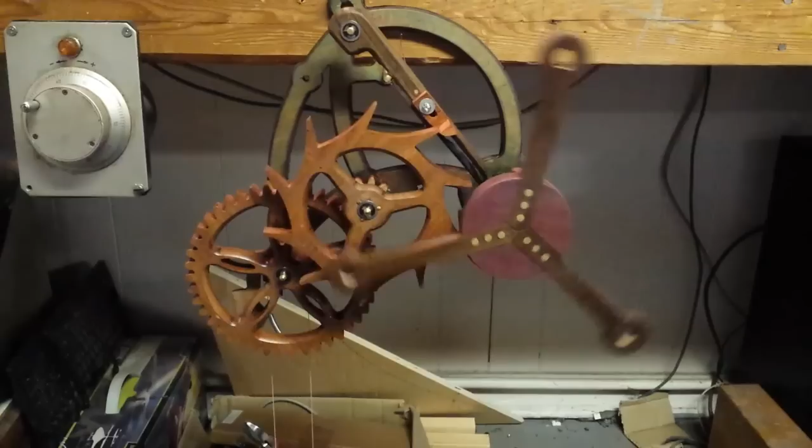Hello everyone and welcome to the video on escapements for Gearotic Thoughts.

This new escapements module has changed some from the escapements of Gearotic Motion. This one is a bit more exact and it's written to a higher specification. Calculations for both the recoil and the Graham are taken from the British Horological Institute calculation test sheets. So the mathematics involved are very accurate to those specifications.

The drawings of the pallets are somewhat stylized from acceptable versions. I did not aim for a crown and anchor, for example, on the recoil, but there's specific reasons why I've gone this route, and we'll talk about those in the future. 4 types of recoils are being offered. Grasshoppers are not yet in the mix.

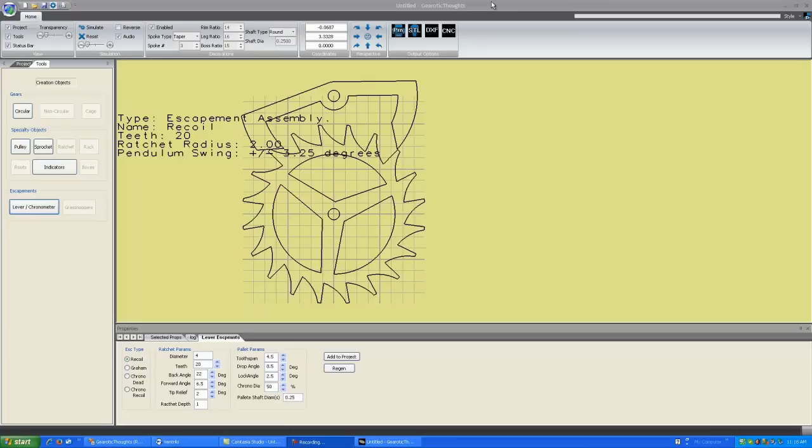They will be added at a future time, but grasshoppers are complex enough I'd like them to have their own module so that we can play a bit of games with giving you some more power with them and add those to gravity escapements. We'll give you more escapements in Gearotic Thoughts than you ever had in Gearotic Motion, as there seems to be a great deal of interest in it. So let's look at the 4 that we have offered.

You can see the one running on the screen now is called a recoil escapement. It is the easiest escapement to build. These 4 escapements are listed in order of complexity to build, and recoil would be firmly in the beginner camp. Anybody can build a recoil escapement. If you have a pair of scissors, you could cut this from cardboard and it would run well. They are notoriously stable. They are not, however, the most accurate timekeepers.

The reason for this is if you look at this ratchet, the center device here is really called a ratchet. And if you look what happens when a tooth comes down, you'll see the ratchet goes backwards for a moment. This is called a recoil. This recoil creates a situation where you lose accuracy in clocks. It's because when the pendulum goes to push the recoil backwards, the recoil is pushing against the backlash of all the gears before this one.

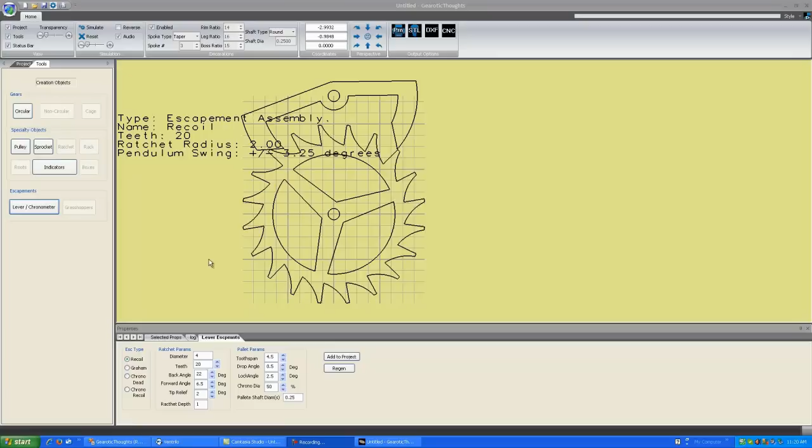And since backlash grows and accumulates over time in a clock or a timekeeping piece, it means that the accuracy of the pendulum degrades over time as well. It slowly begins to degrade, and every few months you have to retune a recoil clock for accuracy.

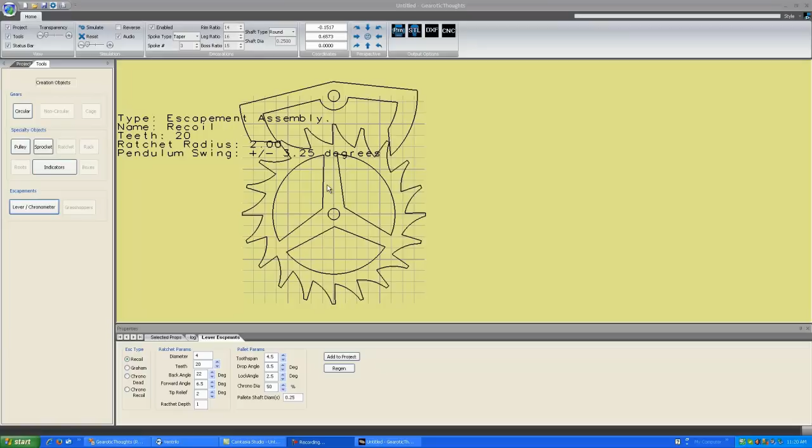Now, that having been said, many of the things you'll build with Gearotic Thoughts, including wooden clocks and so on, the point is not about their accuracy. There is no such thing as an accurate wooden clock. They all are bad at keeping time. They vary in how bad exactly, but they're all bad at keeping time.

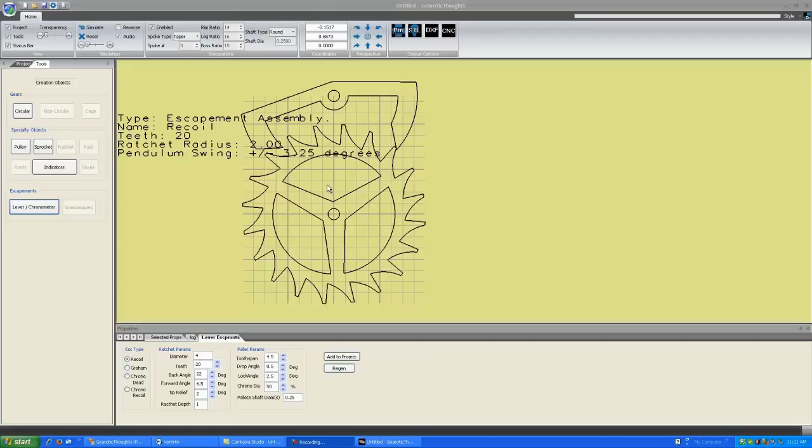But when you build a wooden clock, the point is not to tell time. Wooden clocks are a piece of craftsmanship. They're an art form, a kinetic art form. I'm starting to go the other route and building clocks that don't tell time. I call them tickers. You'll find many examples of them on the web, and I find them intricate works of art. And again, they don't tell time, so you wouldn't have to worry about inaccuracies in time.

However, take it from me, the people who build clocks will tell you that though these recoil clocks are easy to build, they are not the best timekeepers because of this recoil action pushing against backlash in gear trains.

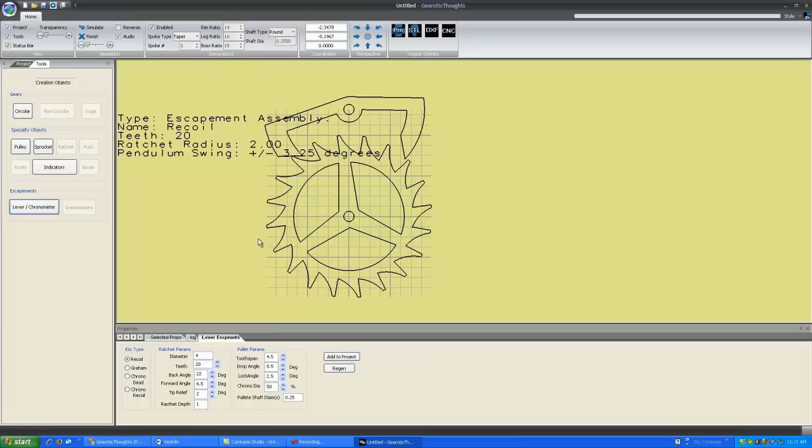Now, we have several selections on the screen. You'll see it's not tied to module anymore. People who are building clocks will generally build this escapement mechanism to a set diameter. They're not really worried about the module of teeth and so on. So Gearotic Thoughts has gone to a diameter system where you enter the diameter of the device that you wish to build. Here, for example, we have 4 inches and it's set to a 4-inch diameter.

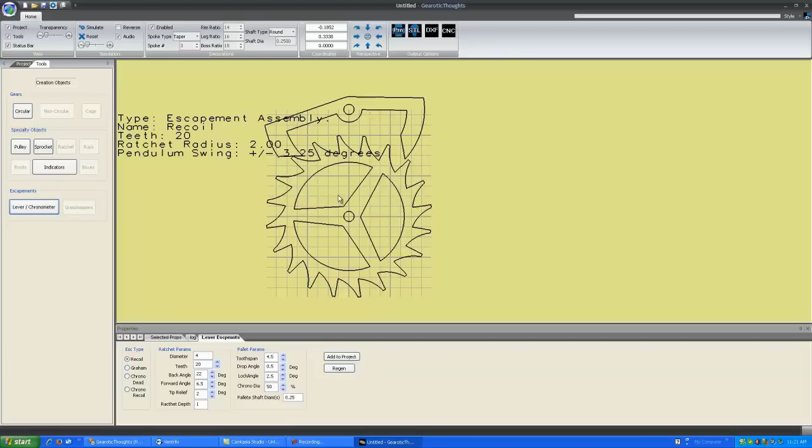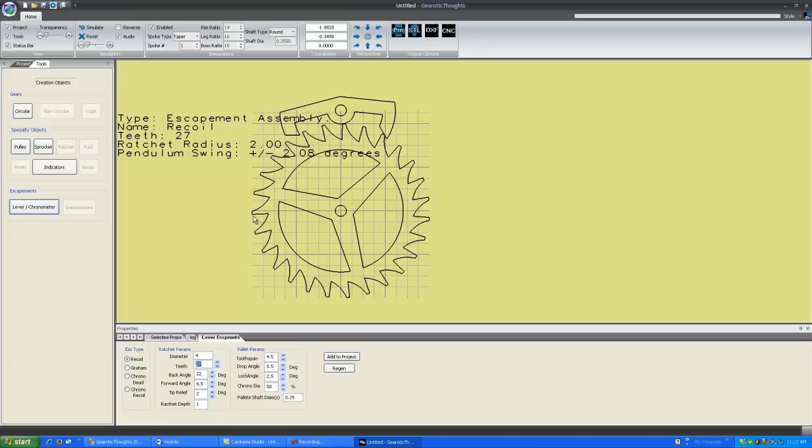Now, number of teeth on your ratchet, on this recoil ratchet, are set down here on the tooth box, and you'll notice as you change the number of teeth, the listing for pendulum swing changes. The amount a pendulum will swing on a recoil escapement is typically set by the mathematics. So we're simply telling you that you're going to get a plus or minus 2.08 degrees of swing when this pendulum has hit its equilibrium and is keeping time.

For the recoil escapement, you can ignore the next 2, back angle and forward angle. Those are used only in a Graham ratchet, but we'll talk about those in a moment. Let's take a look at this in close-up.

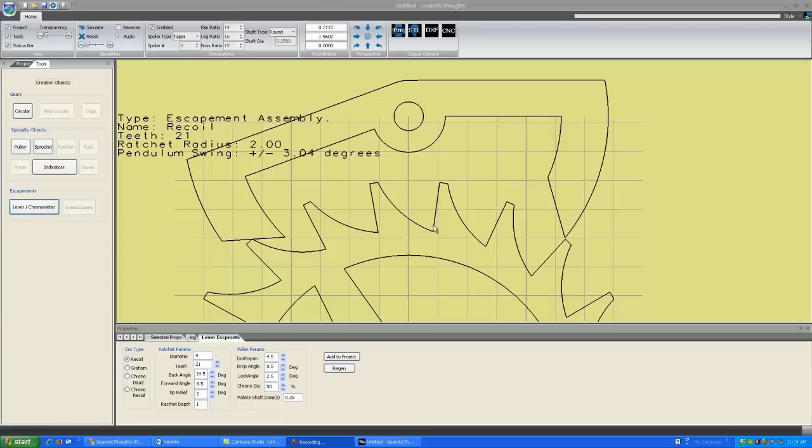The ratchets can be hard to build in 2.5D out of wood and other materials because too pointy of a tip will snap off easily. If you picture that this ratchet is made from one plank of wood, for example, and not plywood, the grain of the wood would always be running in one direction. If you get a tip of a tooth and it's on a grain which is running in the wrong direction, you're going to snap the tooth off, unless you've got a fairly good tip allowance to it.

So because of that, we have a tip relief where we can set the number of degrees of tip relief. And you can see as I change it, the size of the tooth of the pallets on the recoil pallet change. And this is because we have to worry about a thing called drop and lock in such escapements. So I'm going to turn the tip down to about 1.5 degrees, which is pretty typical when I'm cutting something out of wood.

So I guess what we should say is the more tip relief you have, the less power you're going to be transmitting to your pendulum, because as the tip gets larger and a higher degree, the pallet size has to get smaller to be able to fit in between the teeth. So obviously, the more room you have between teeth, the larger the pallet impulse face can be, and the more power you're going to transmit to a pendulum.

Again, if you're making a piece of kinetic art, this may not be too important. Your overriding concern will be to get a thick enough tooth to provide stability to whatever you're building. And the amount of power you're transferring will probably be a bit secondary to your consideration. If you're building a clock, however, you want as much energy transfer to the pendulum as you can get to maximize the length of time that your clock will run on a wind in the end. I can tell you 1.5 degrees is, again, pretty typical.

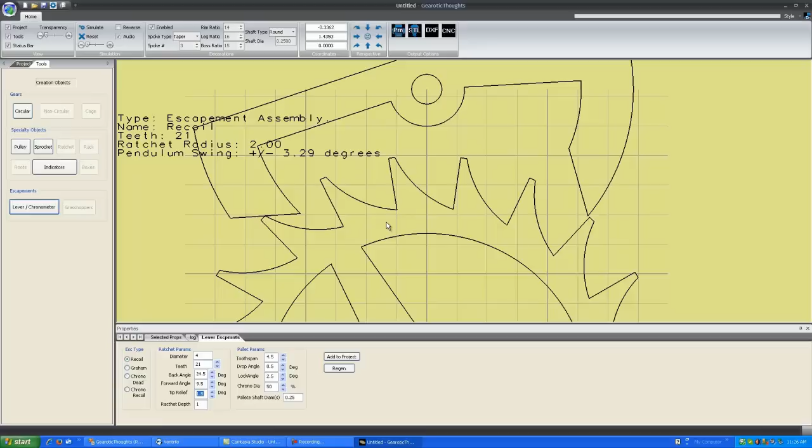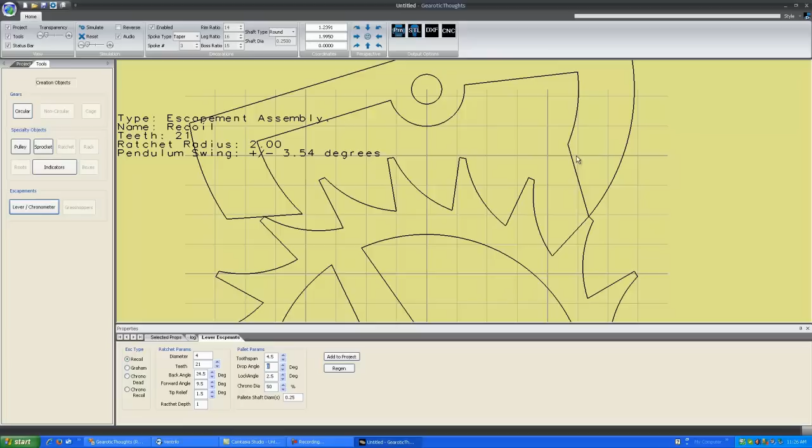So watch what happens as we simulate this. We have our 1.5 degree tip relief, so the lengths of our pallets are changed, but watch this tooth as it comes down, and we can see it just misses. If we change the drop angle to 0, you can see that the tooth here on the right is just touching the ratchet tooth, and this would not be very good. At some point, looseness and tolerances in these bearings and so on, the tooth is going to hit.

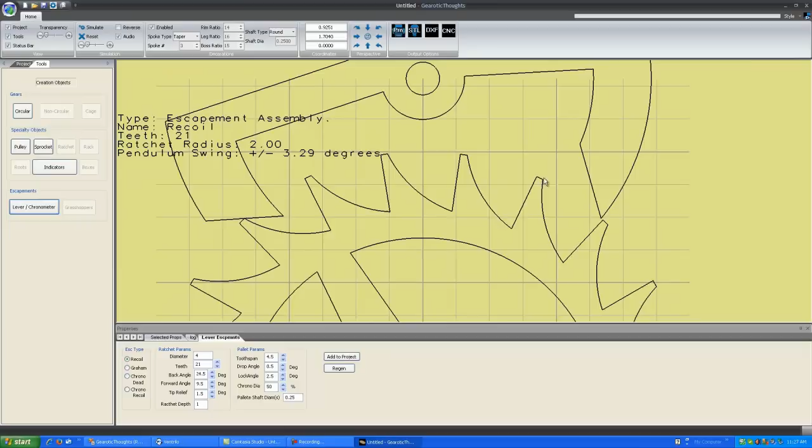So because of that, we'll add a little bit of drop in order to make sure that the tooth will miss, and I'm going to go with about 0.5 degree of drop, which is typical. Tip is actually included in drop. So we have 1.5 degrees of tip and then 0.5 degree of drop for a total of 2 degrees of drop. That's getting about the upper limits of what you would want for the sake of efficiency in transferring energy to your pendulum. But just make sure with your drop that you're missing this tooth as the recoil comes down.

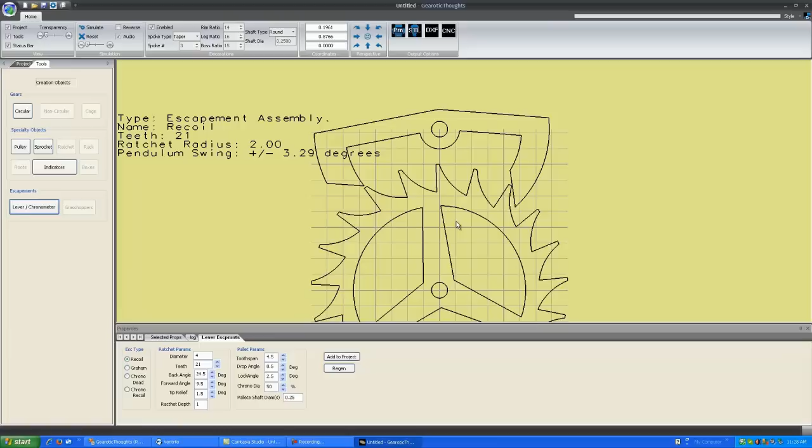We hit, it recoils, tooth slides off, and process repeats itself where we just missed the tooth. That's drop. So that's all we really need to worry about in terms of a recoil. We have a lock adjustment to worry about, and the number of teeth and the span that you wish to span. These are all decisions up to you based on aesthetics and however you want to time your device.

Typically, a recoil escapement has around 30 teeth and has a tooth span of about 7.5 teeth of a 30-tooth wheel. How you pick the number of teeth of this depends largely on the ratios you intend to use in your clock, and we'll leave that for a future video. But that's a recoil escapement in general.

You'll notice there are many other settings down here. They'll have no effect on a recoil. A recoil is so simple that all there is is teeth, tooth span, and lock. That's really all you need to worry about.

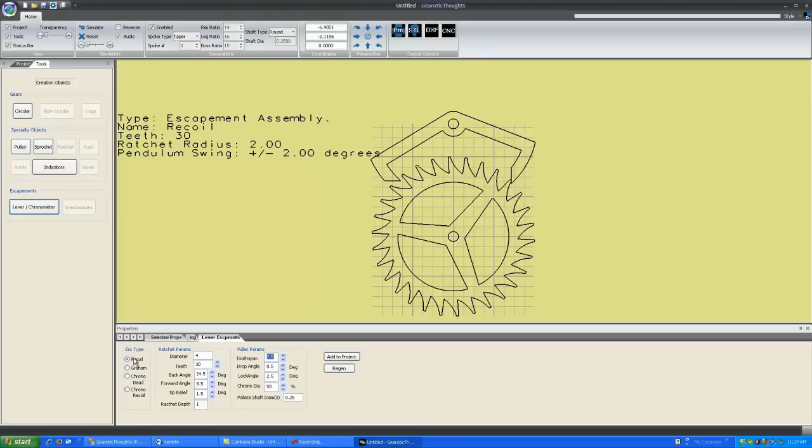So then it's off to the Graham escapement. The Graham escapement was a way of fixing the problems that a recoil escapement had in its losing accuracy because of the backlash of the train. You'll notice that the ratchet here does not move backwards. It moves only forwards. This is why it's called a deadbeat escapement.

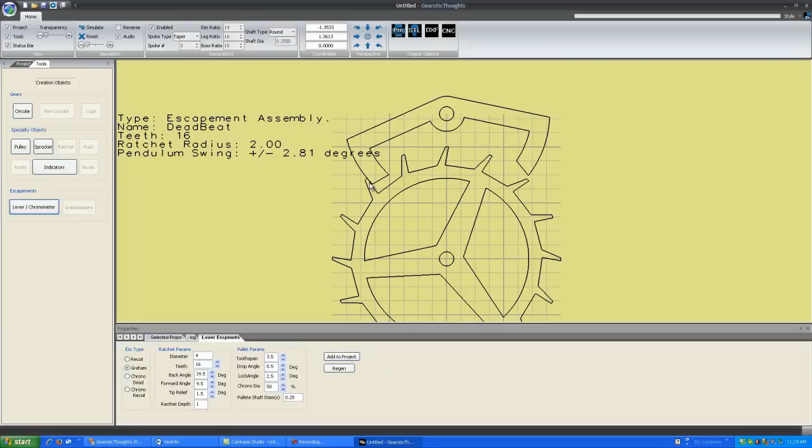It is dead when the clock beats. The ratchet wheel never goes backwards. But we have things to worry about because of it. The reason that we have a ratchet which doesn't go backwards is because of these rounded lock faces on the pallets. You'll notice that because they're rounded, the tooth comes up and hits, and it's at a tangent relationship. It never has to go backwards as this moves back and forth.

Let us take a look at one tooth and see what we have to adjust here. You'll notice as this tooth comes down, it hits this face, and there's a large portion where it sits still before pushing on the pallet. This wants to be minimized, but you do need some, and this is called the lock adjustment. The amount of lock you have is basically how many degrees of the lock face of this pallet which you are striking on when the tooth comes in.

And down here on lock angle, you'll find I'm set at 2.5 degrees, which is quite a large portion on here, and that would be unusually large. If I cut it down to 0 degrees, you can see that what happens is when the other side releases its tooth, this tooth will come up and hit the pallet exactly at this corner. This is a situation you wish to avoid, because again, if there's any inaccuracies, remember that at this moment in time, this pallet is swinging downwards, and you don't want to crush this tooth if the tooth just happens to get underneath it. This is why we add lock.

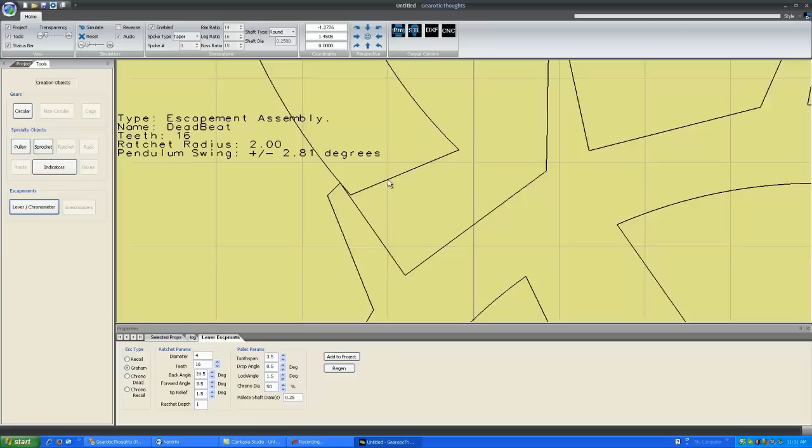So let's add a little bit of lock. 1 degree, 1.5 degrees is pretty typical, and right there is good. This means that when this tooth snaps forward, it's going to hit this lock face with lots of room to spare. We're not at risk of it going underneath the tooth and getting caught or jammed. That's the best situation to have.

We have a similar situation on the other side where we do have to worry about the drop as well. And you can see I'm set to 0.5 degree of drop right now. 0.5 degree is not bad because we're adding it to the tip. So we have a total drop right now of 1.5 plus 0.5, or 2 degrees of drop, which is a pretty good place to be.

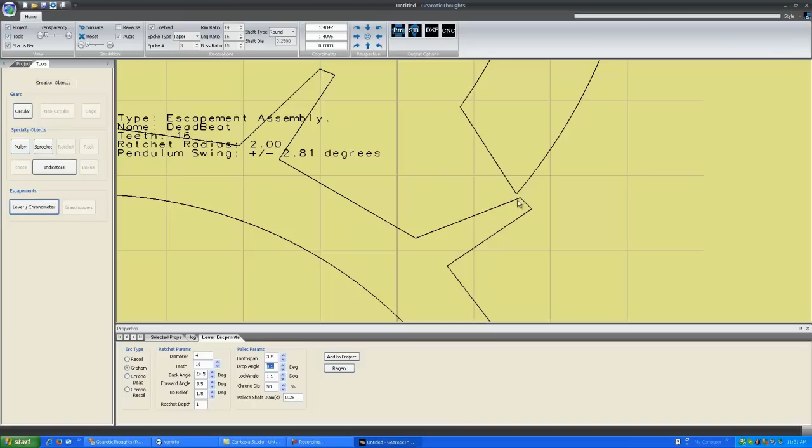Those are the only adjustments that you really need to worry about on a Graham. A Graham is much more accurate. It doesn't have to push backwards, and it will keep time without adjustment. Once you adjust it for accuracy, it's unlikely that it's going to go out of accuracy for the reasons of backlash. So it is considered a better escapement than a recoil, a more accurate escapement than a recoil.

But again, if you're going to make something out of wood, you're not building it for accuracy, so you'll have to make a decision whether a Graham is actually better for you than a recoil, given that a recoil is much easier to tune in and make run for good. As you can see by looking at this Graham, your accuracy requirements are a bit higher, and that's why the Graham is the second escapement, or a more advanced user's escapement.

These teeth have to fit exactly in their spot. You must do a good job of shafting and bearing to make sure that everything is structurally sound, because any motion in the distance between these shafts may cause a situation, much more easily than a recoil, where you stop ticking. So again, recoil, no problem. It would be hard to mess this up.

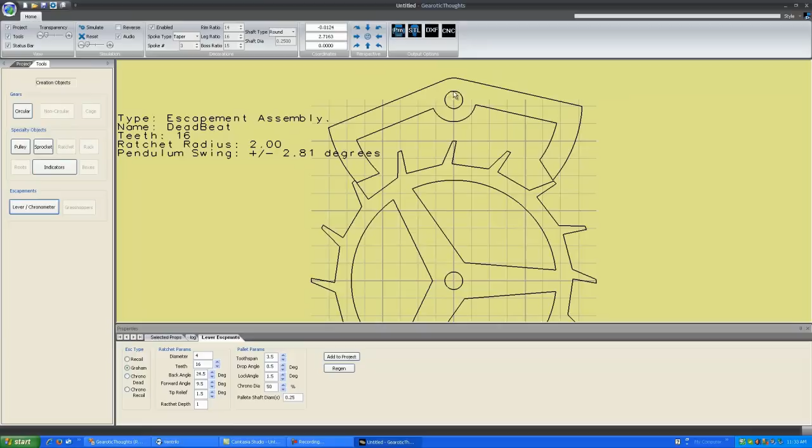On a Graham, you have to give a bit more thought about what you're doing, and that's why I advise that if you're going to build a Graham, build it after building a recoil. The recoil will teach you a great deal about how to make things strong enough to run as a clock, whereas the Graham, once you've learned those lessons, you'll find is very easy to build, and it is much more accurate. It's up to you whether or not you're going to try for accuracy or try for other factors, other aesthetics in what you're building.

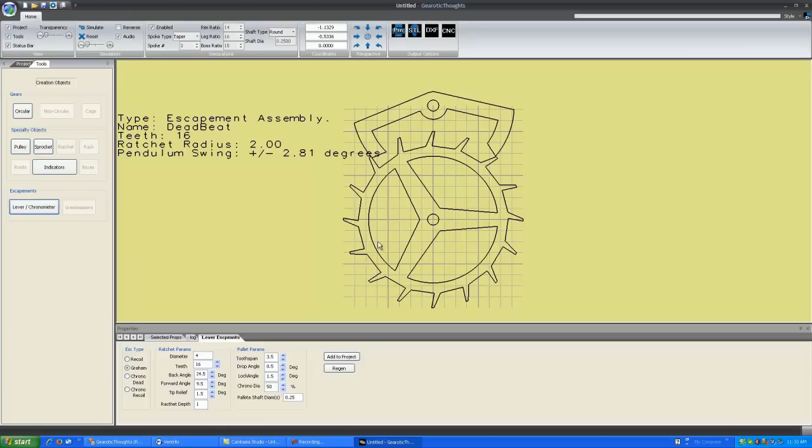And these two escapements really give you the choice between accuracy and ease of use or stability over time. These are the two best escapements to use for building a timekeeping piece. And that leaves us with chronometer escapements. Chronometer escapements come in two flavors.

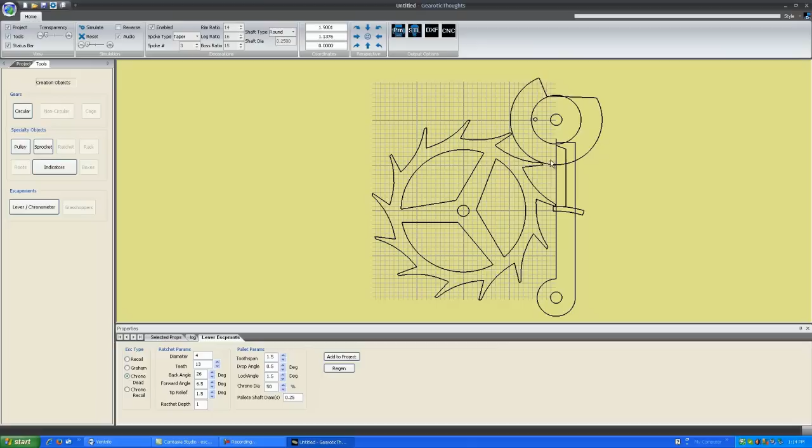One is a deadbeat chronometer, and if we simulate it, you'll see that the ratchet never moves backwards. So just like in the first two examples, this one would be closest to the Graham. It has a lock face, as you can see, this round edge. Although this lock face is actually never used. It is actually just a safety face to keep this wheel from running down should it become accidentally unlocked.

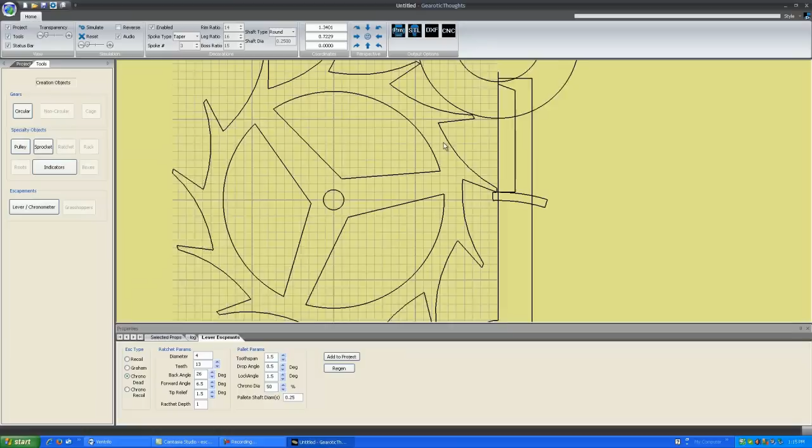If we stop the simulation and zoom in on it, you'll see the teeth actually never touch that safety face. They would only touch it if this lock face were to snap off or snap away at the wrong time. Then these teeth would come in and hit the wheel and stop the device without causing damage from a wheel running too fast.

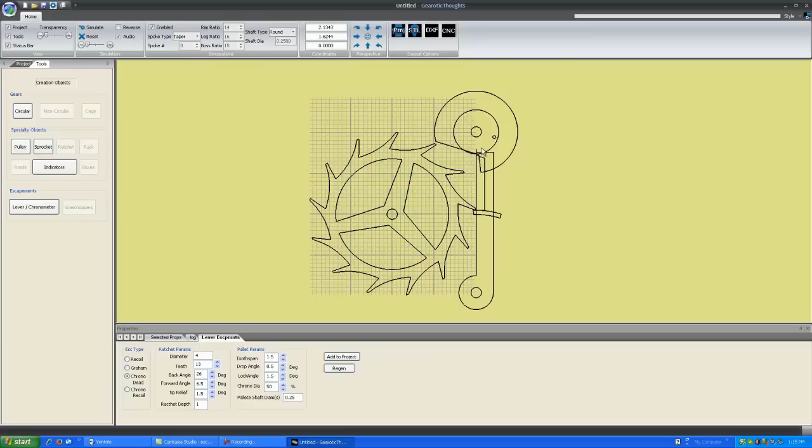So in a chrono, typically there would be a spring on this wheel, which will cause the wheel to rock back and forth. And as it swings in one direction, it flicks a spring out of the way, the gold spring it's called, and in the other direction it will hit the spring, cannot flick it out of the way because it's in front of an arm. It will flick the arm to the side, thus releasing a tooth, causing the wheel to turn.

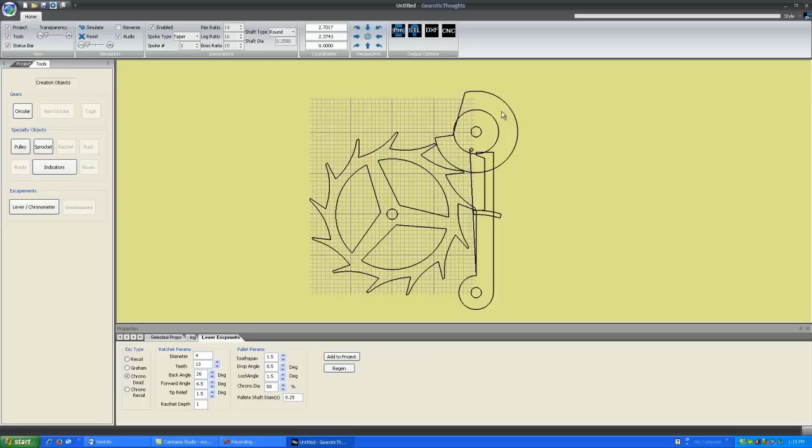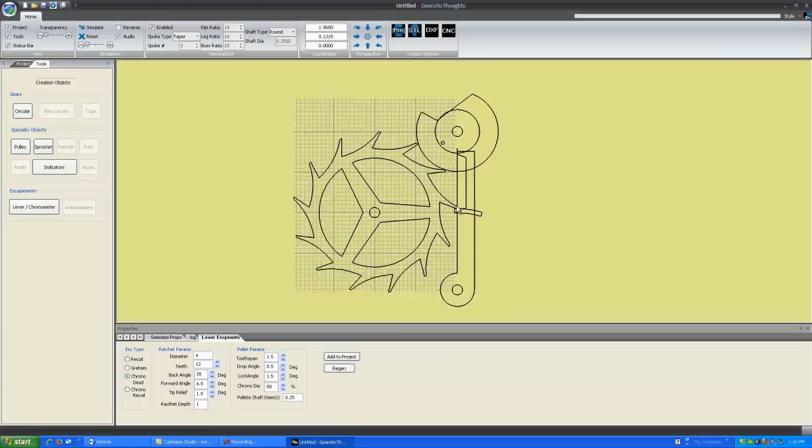And it's synchronized with this impulse pallet with a hole cut out of it so that the tooth presses here on the pallet, adding energy to the spinning pendulum. So if you think of it in classical terms, it is simply adding energy to the pendulum, which then swings back. It's ignored in one direction, and then energy is added again in the other direction. That's one use of a deadbeat chronometer.

If you were to take away a spring, though, and put a wheel on it so that the wheel was free to spin, what would happen is it would get to this point, it has energy, it would spin all the way over, at which point it would trigger the wheel again and spin even faster. And what you would have is a kinetic engine, a unidirectional kinetic engine that slowly ticks down the teeth of your spring while keeping a wheel spinning.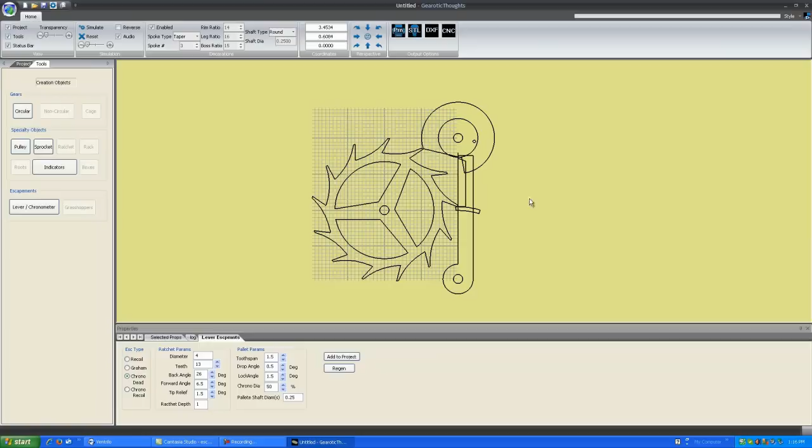And depending on the speed you have this wheel spinning or how it's geared down to whatever output mechanism you're using, this means that you could have a wind-up device which runs a motor for a very long time in a single direction. The last type we're going to look at, and the type I decided to use in my toys, is the recoil chrono.

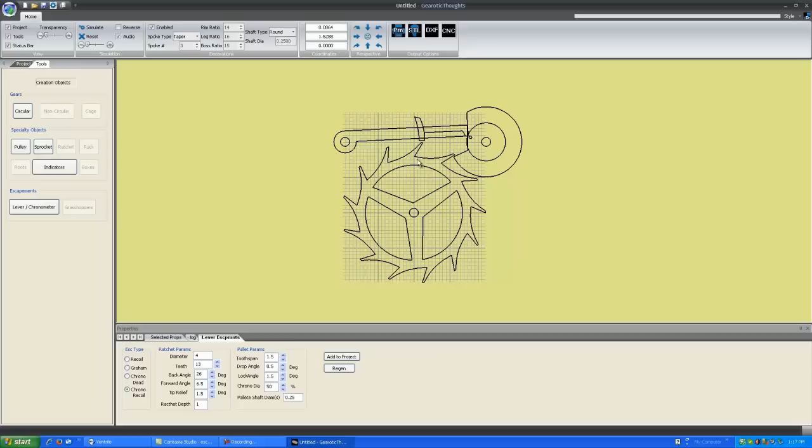And if we look at it in simulation, you'll see it's basically the exact reverse of what we just saw. In this one, when the pin comes around, it's going to strike the tooth out of the way, which causes the ratchet to hit the face and stop its motion, reverse it, and send it back in the other direction. At which time it will repeat itself.

Now again here, I've got it simulated as if it were on a spring, but that doesn't have to be so. Imagine that the tooth presses on the wheel and there's nothing to stop it. This wheel would then continue to rotate counterclockwise several times until it runs out of steam.

When it runs out of steam, the heavy part of the wheel will always end near the top of travel and then come back down, and as it swings back down, it will hit the tooth, release energy, and repeat the cycle. And that is the energy cycle of something like Gearotic Ticker number 1, which you've seen at the beginning of this video.

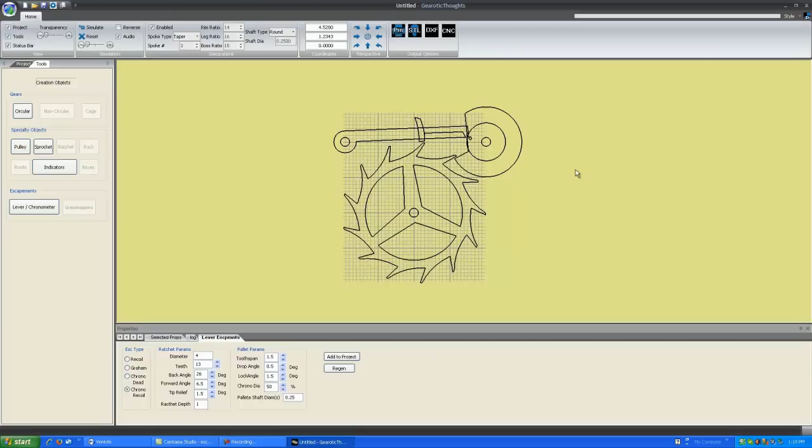But we have it drawn here as if there is a spring on this wheel and it's rotating back and forth. Now the best way to explain these, however, is in 3 dimensions, because this is a 3-dimensional device and it's very hard to look at in 2D. So let's create one and add it to the screen so that we can see exactly how it works.

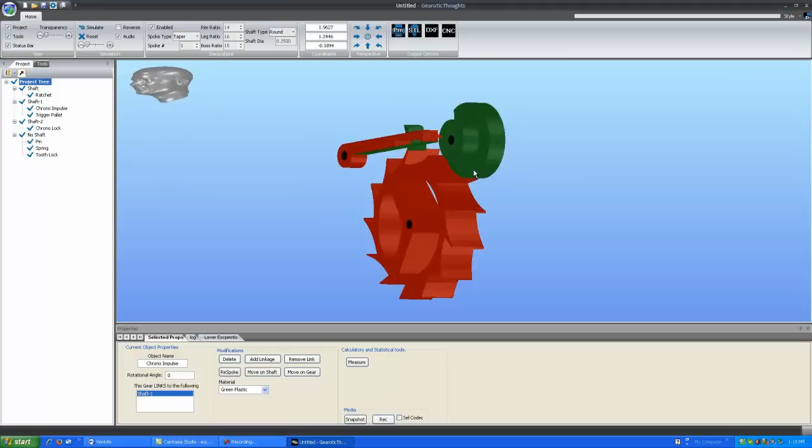As you can see, the trigger arm actually sits away from the ratchet. It's over here, and it holds a tooth. How you bolt it on depends on, of course, what you're making, and that's another point.

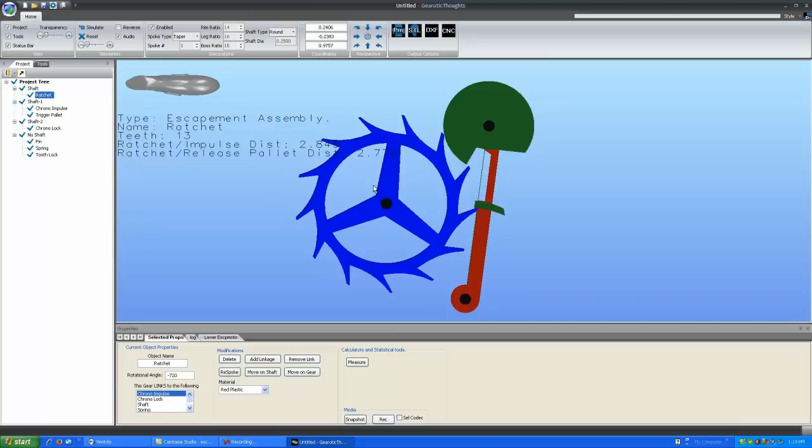These are complex enough devices that although Gearotic Thoughts is very handy in that it'll give you the centering locations, an exact template, and it will cut out the ratchets, when it comes to these pallets, it's giving you perfect numbers. That is to say, it's making this wheel the perfect diameter.

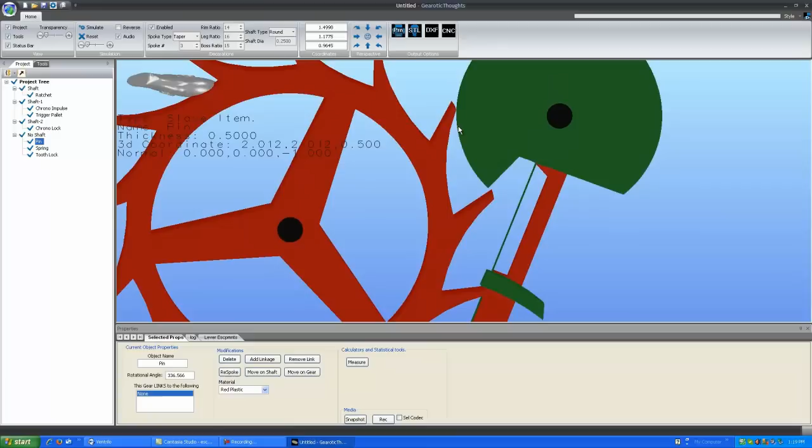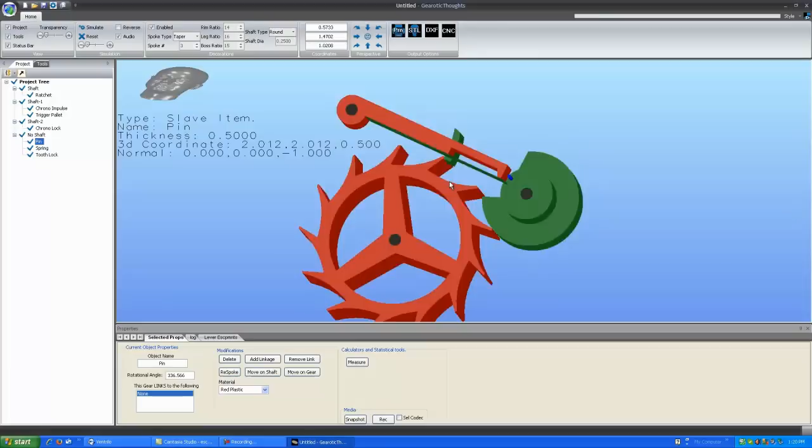And you're going to find in practice, like when, for example, when I built my Gearotic Ticker number 1, this would have to be shaved down by probably 1 to 2 millimeters in order to allow for sag tolerances of shafts and so on. So keep in mind that all of these things are to perfect specification, and you're going to want to modify them some as you build them, but they're essentially very simple devices. They are circles with a pin in them or with a notch cut out. So these are things that you will fabricate for your devices as you go.

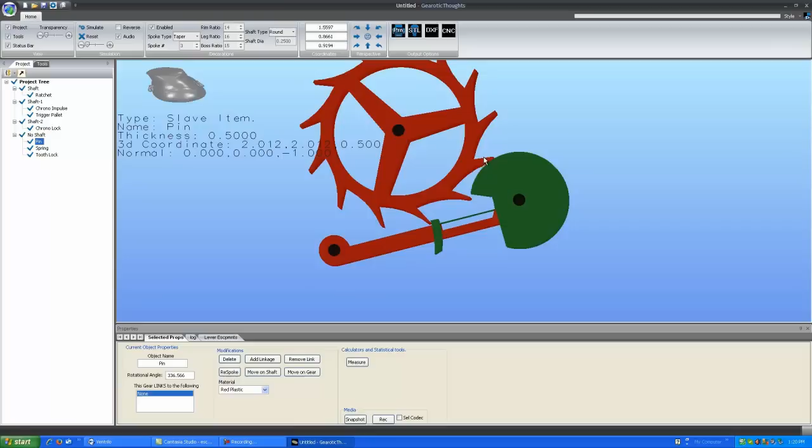Same thing for this trigger tooth, which is holding the ratchet in place. How you come up with a trigger lock is up to you. On a construction device like the one I made, you need to have it adjustable back and forth in this dimension in order to fine-tune where these teeth will sit against this wheel when the device is moving, because again, as you can see when we zoom in, these teeth are not meant to touch this wheel. This is a safety wheel. So you're going to want something which can adjust this tooth up and down slightly in order to maintain this balance. Here you can see our spring, our gold spring.

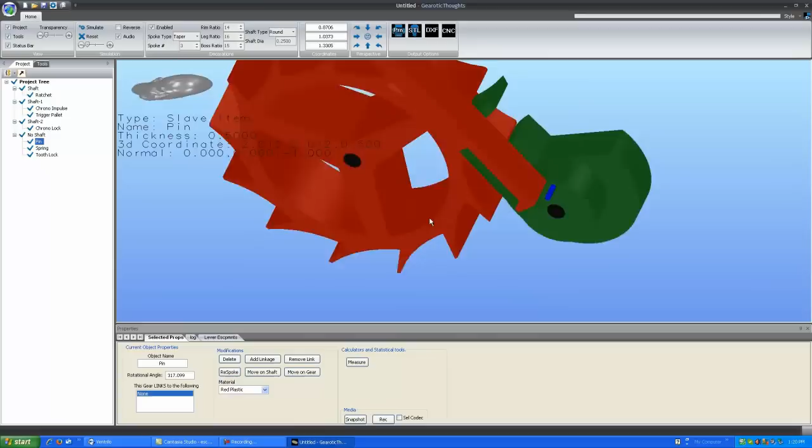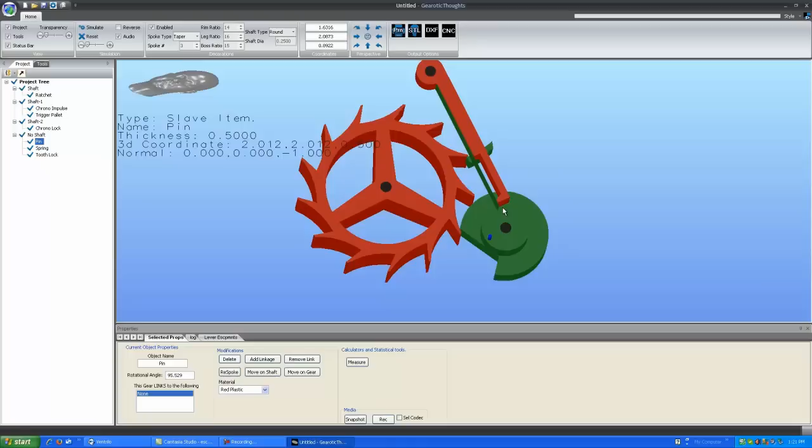So in simulation, as the pendulum rolls back and forth, the pin is either going to push the arm out of the way, which will then cause the ratchet to add energy to this pendulum, or it will flick this spring, having no effect whatsoever on the ratchet or the pendulum as the pendulum uses up its energy. In order to show this a bit better, we can add a spur gear to it. I'm going to go to Tools and get a large enough spur gear that we can just add that to our project, and we'll add it to where it would be.

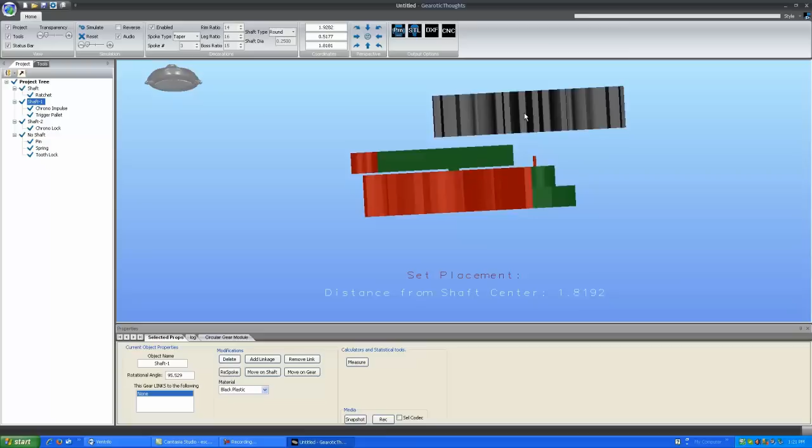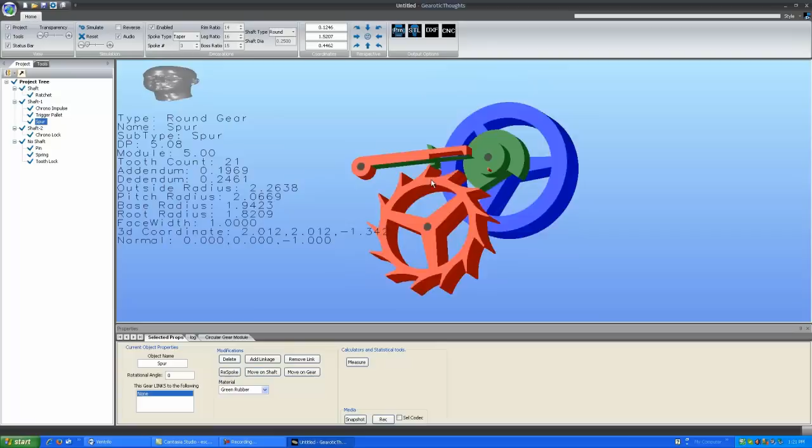You can also, on any spur gear, right-click it in the project window and say Strip Teeth. And once you strip the teeth, it begins to look more like a part of a clock. That strip tooth gear, I know some people have wanted it for a while anyway for other projects. That is available as of the last version. So now you can see this is what a watch typically looks like when you open it up. You would also see a coiled spring here, causing this wheel to turn one way and then the other.

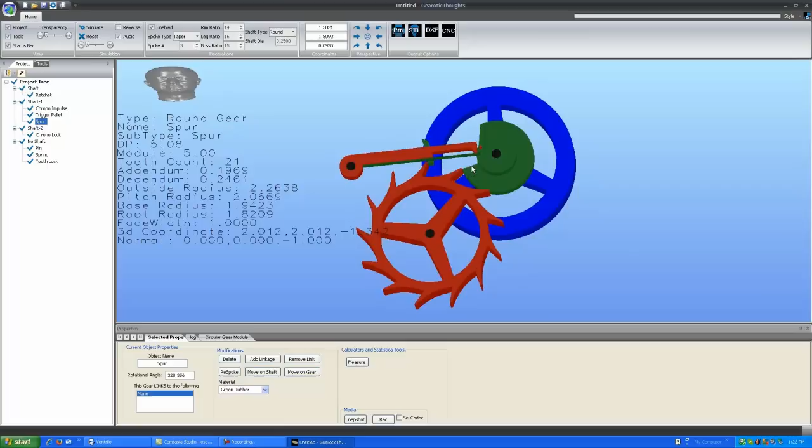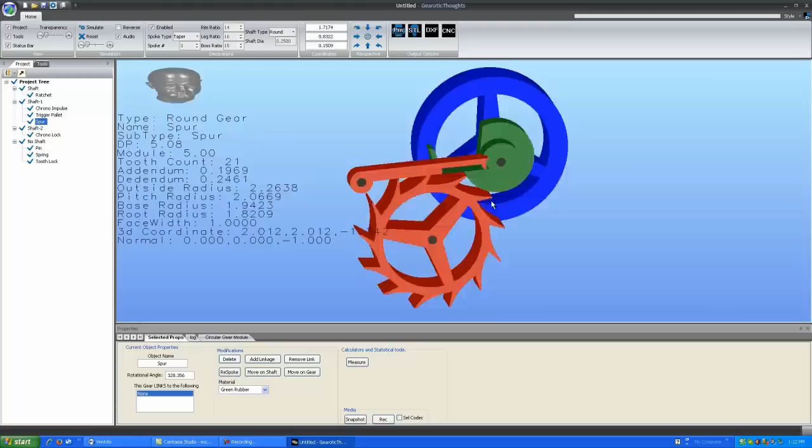In Gearotic Ticker number 1, we don't put any spring, so what happens is the wheel, once it gets kicked, will rotate counterclockwise many times, flicking the spring each time, having very little effect on the wheel. But eventually the heavy part of the wheel will end up near the top. It can't quite make it over, so it falls back, and when it falls back, it releases the arm, which triggers another cycle. And that's essentially the way a lot of kinetic art works. Kinetic art that uses escapements, this is a pretty classic escapement. There are 2 or 3 others that are common, and I do hope to give you examples of those in future as well, as I get them myself.

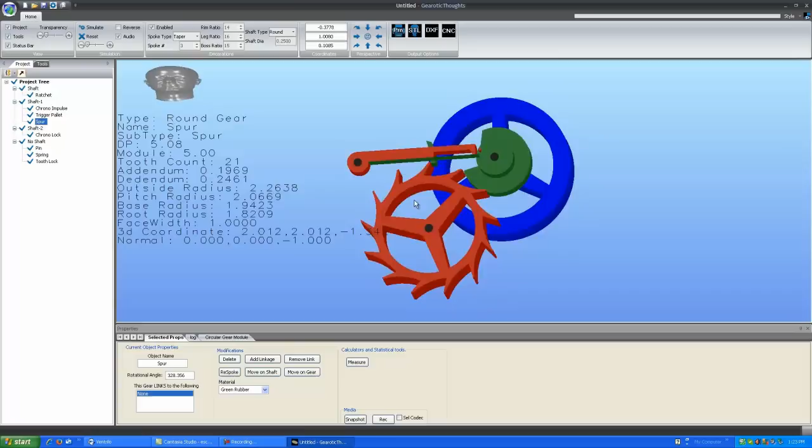All that having been said, I think we have to look at one final thing when it comes to chronometer escapements. We have to look at the actual construction details, because unlike many of the things that GT puts out, we're getting into an area, and I think it'll happen increasingly, where we're putting out things too complex to show you every bit and part. So a certain amount of construction expertise has to be developed. For example, take a look at the trigger arm on this drawing.

We hadn't really talked about the trigger arm, the fact that the trigger arm has to spring back to 0, and you'll notice a very small post, this small brass rod sticking out. This is what the trigger arm, when it swings back in towards the ratchet, is going to bottom out on, so that it doesn't come in too far. And this is a post that I just have shoved into the background skeleton frame. So you have to take note that things like a trigger arm are going to have return springs and so on. I will be making a separate video on the building of this particular ticker, and we'll go into a lot of the construction details then. In the meantime, take a look at this video.